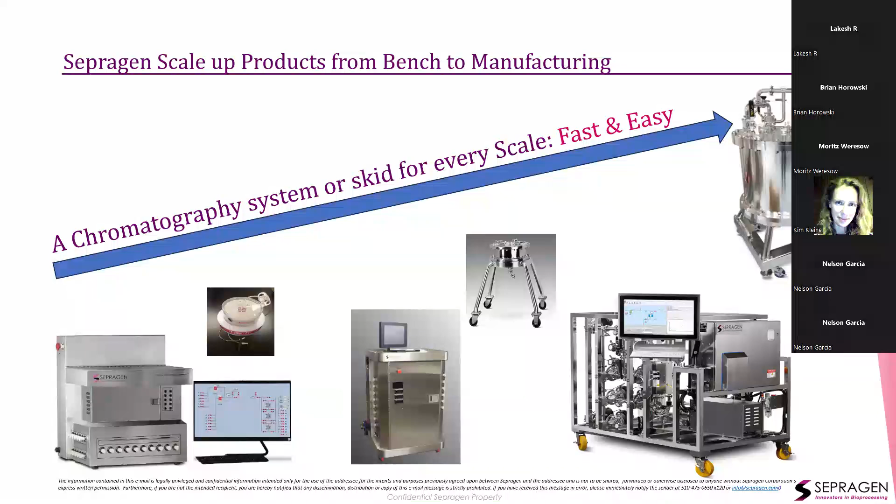Okay, so now we are going to get started with the topic at hand, which is the advances in process chromatography systems. Now, why are we addressing this topic? Because for most people, when they are looking at a chromatography system, it's either a greenfield or brownfield site, or the equipment is older, and what do they do? They just want to replace it, right? And it's really the wrong choice to address the problem like that.

So how do these engineering companies or MSAT or PD scientists choose this process chromatography automation equipment? Well, if they want to scale up, they just get a bigger piece of equipment with higher flow rates. And they put a URS together and cut and paste from a URS they had before. Worse, they take a vendor spec and convert it to a URS, and then ask their purchasing people to find out different vendors, get bids, prices, delivery, and they eliminate them based on some technology or previous experience they had, and they go ahead with it.

Now, why do I say it's the wrong choice? Because the world as it existed 10 years ago isn't what it is today. The constraints we face—cost, space, throughput, cycle times—are very different, and your choice of equipment directly affects that. So if you look at this little plan I have down here, it's a facility blueprint, right?

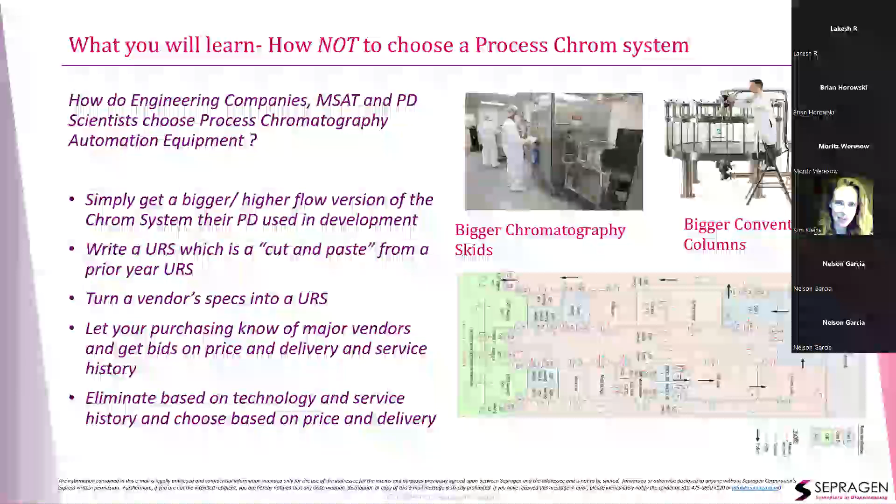DSP is stressed. We don't have enough space to fit in columns and process equipment. Maybe we can have a bigger column, sure. But then you're going to need a bigger skid. What about buffers? You're going to need more buffers. So what do you see in these facilities? You have totes lined up, buffer totes lined up down this corridor, right? You're doing more cycles, bigger equipment, longer hours, more FTEs. So it's hardly a solution to what could potentially be a big problem.

And of course, we are trying to reduce costs. We all say that, but what makes up the cost of making a biological drug? Well, of course there's amortized costs of development, sure, and regulatory. But besides that, what's really under our control is the amortized capital cost, right? The facility cost, the equipment cost, consumables, and then, of course, most importantly, labor.

Now, if you have a very complex workflow where you have 8 to 10 weeks per batch, like this on the left-hand side, different batch unit operations, and you have lots of hold points where you're getting QC done, and lots of manual intensive operations, whether it's column packing or buffer making, well, your labor costs are going to be huge, your cycle times are going to be huge. So what can you do to address that? Well, your choice of equipment definitely impacts that, and we'll see as we go forward.

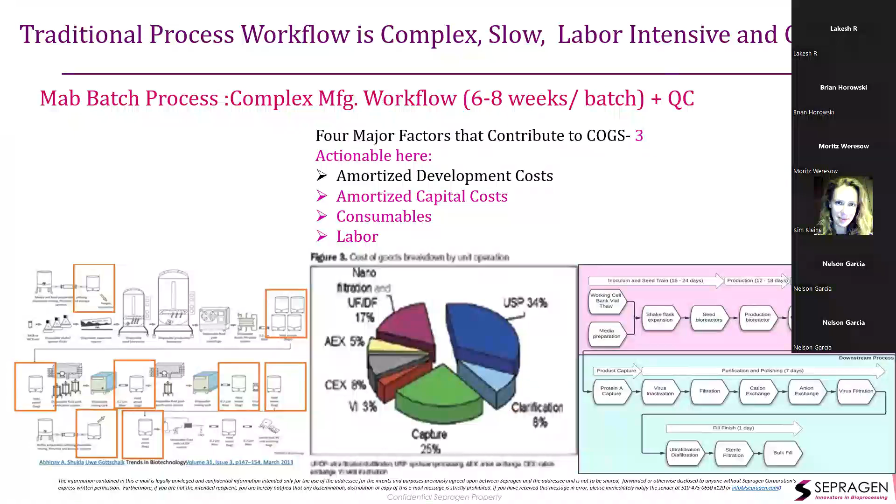And this is a typical antibody manufacturing process, going from cell culture, centrifugation, chrom capture, viral inactivation, flow through steps, UFDF, formulation, fill, finish. You have hold points along the line, and you have buffer management for all these different steps. So again, slow, laborious, traditional processes.

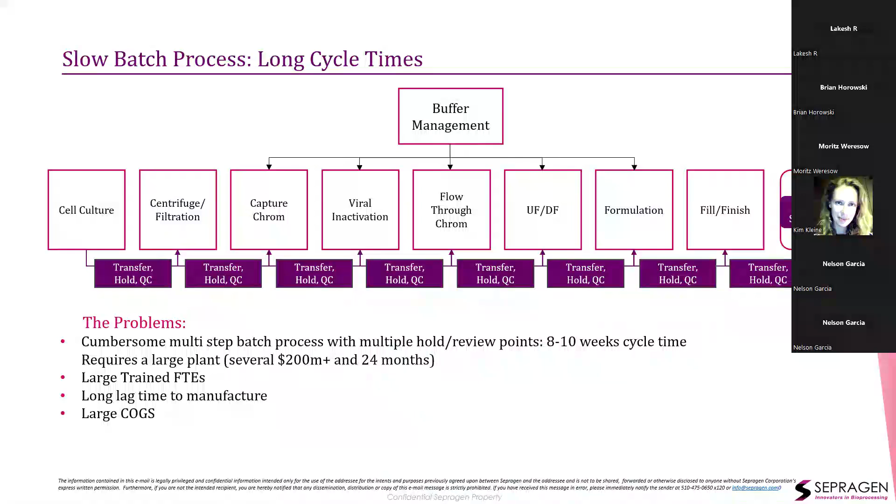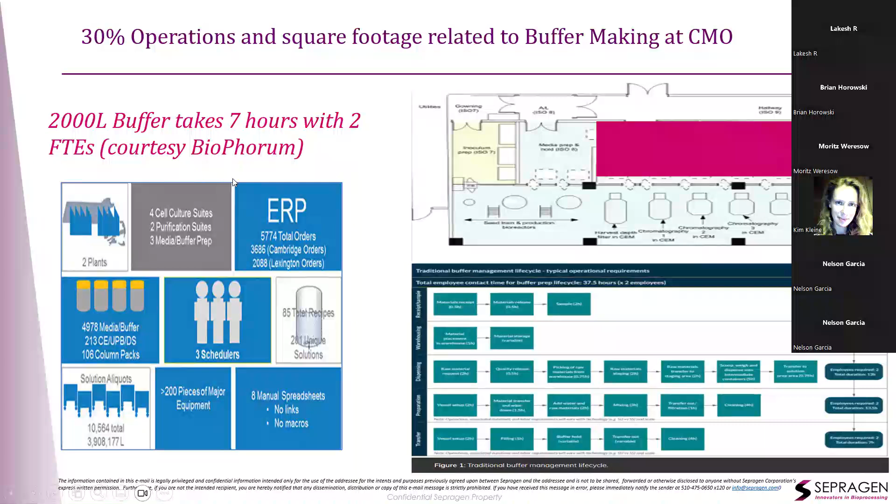Now you'll say, why this? I thought this was advances in chromatography. Why are we talking about buffers? Buffers are integral to doing chromatography on a large scale, right? And here, for instance, there are 4 cell culture suites, 2 purification suites, 3 media and buffer prep, in these 2 facilities that BioPhorum looked at. So about 30% of the operation is buffer making.

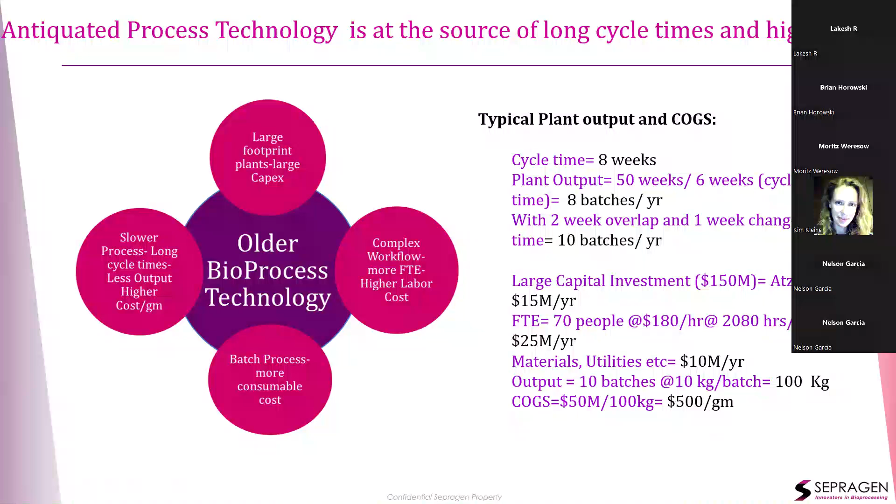And of course, all this, whether it's the capital costs or the FTEs for a particular plant, all go to make your cost of goods, right? Right down here, 8 weeks cycle time, so you can make 8 batches a year. Even with overlap, you could do 10 batches a year. If you have a $150 million facility, that's 15 million contribution per year. If you have 70 FTEs, that's 25 million contribution per year. You have materials and utilities, and the output of the plant is 100 kgs. That's $500 a gram, and that's being very generous. It's usually 1,000 plus.

So what can we do? Okay, what are the 7 critical advances that we want to address and talk about today?

One is that when you get a chromatography system, you want the maximum range from those machines, so you can use smaller columns, medium columns, larger columns, as wide a scale as possible. That's not the case with most systems. I find people saying, okay, we know we're going to be running at 3 liters a minute, let's get a 10 liter a minute machine. Well, that doesn't work that way in case we have to scale up.

The problem is that machine is then not effective on the low end of the flow rate. So the pumps don't run very accurately when you're running at a liter a minute or 500 mils a minute or something like that. The turndown ratios are not there. So then you're running your process, which you think you've designed for the future, but it's really being compromised because you're running at a very low flow rate. So the repeatability isn't there, and the variance is very high, because it's usually a function of the max output.

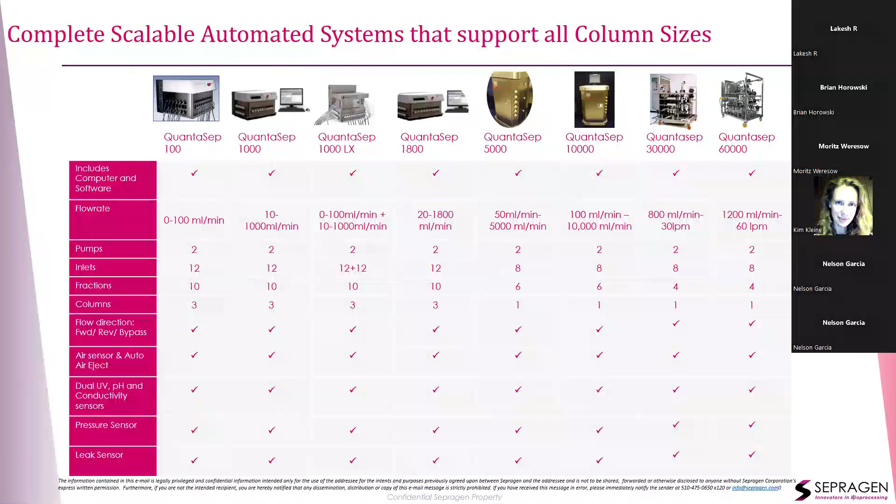And small scale, 0 to as little as 100 mils a minute. And similarly, we have single-use systems going from very tiny scales, 0 to 100 mils a minute, with disposable sterile flow paths that you could use for gene therapy, for instance, all the way to much larger scales doing 1,000 liters an hour, again with multiple flow paths.

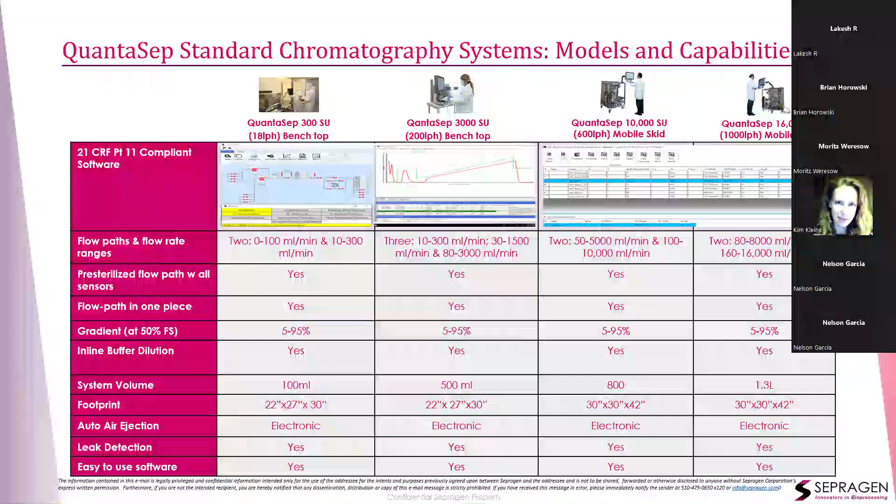So I'm not going to go into details here, I'm just giving you an overview, so if you're interested, you're at least aware of what's out there in the universe. And if you choose to, you can engage with us. We'd be happy to discuss further.

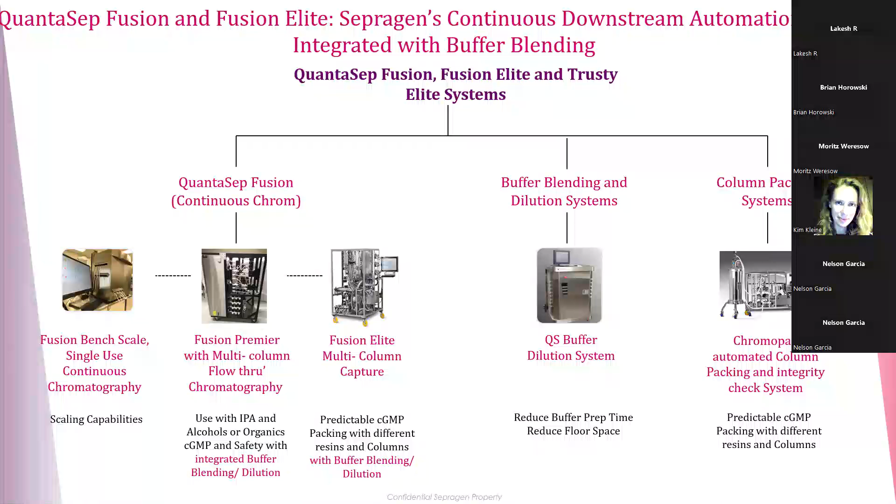And then continuous chromatography. We have bench scale systems, large scale systems, buffer dilution systems, buffer blending systems, column packing systems, explosion-proof systems for people using organic solvents.

So just to give you an example of the level of flexibility, and when I was talking about wide range, for instance, I'll take the example of multi-use systems called Trusty. I'll take the example of our QuantaSep Trusty 1000LX. You'd say, what is that? Well, it's a bench scale chromatography system which has 2 flow paths in one.

What that means is that you have a 0 to 100 mil gradient system, so 2 pumps running 0 to 100 mils a minute each. And on the machine and on the software, you can choose whether you're going to run in the 0 to 100 mil a minute mode - it's a double-decker system. And on the bottom, you have 2 pumps, each running at 1 liter a minute.

So you have 12 inlets, 6 inlets on each of the flow paths. You have 10 fractions on each of the flow paths and up to 3 column devices and sample injection loops. So essentially, with this machine, you can choose to do PD work and use small columns and run between 0 and 100 mils a minute, or you could put bigger columns in here.

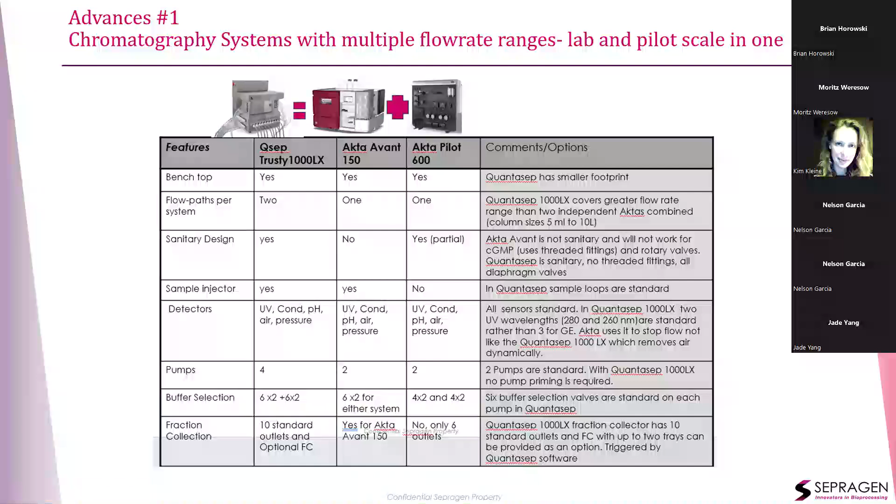If you're using both all the time, great, then this is a good solution for you. If you're not, and you use this larger machine once in a while, then it's a wastage of space, wastage of money, wastage of FTEs, because on one machine with the same HMI, you can choose whichever flow path you want to run and do development work as well as scale up work in the same machine. That's what I'm talking about, having this additional capability and having you be aware of what's really out there.

And this shows you an inside look of the two small pumps and the two larger pumps at the bottom, the small flow paths with smaller valves and the larger valves, all with the same software, so you can choose whichever flow path you want to use.

And then advanced capabilities - everyone can make a method, do equilibration, wash, elution, sample injection, fraction collection, have a fraction collector, collect a bunch of fractions, all that. You can automate, you can do things manually by clicking on the picture. Our systems would do that, but here's the deal - if you're doing larger runs, what about bubbles?

Air bubbles - you know that if you have a system running at a liter a minute, and air gets in, well, you can have an air sensor and that'll give you an alarm, it'll pause. Somebody has to do something about it.

If you put a bubble trap, then the bubble trap has cleaning issues. You have to clean it. It has dilution issues - you certainly can't run gradients through the bubble trap. So that's a problem. What we have is an auto air eject system, meaning our system is smart. It'll detect the beginning and the end of the air bubble interface, and it ejects it out in real time.

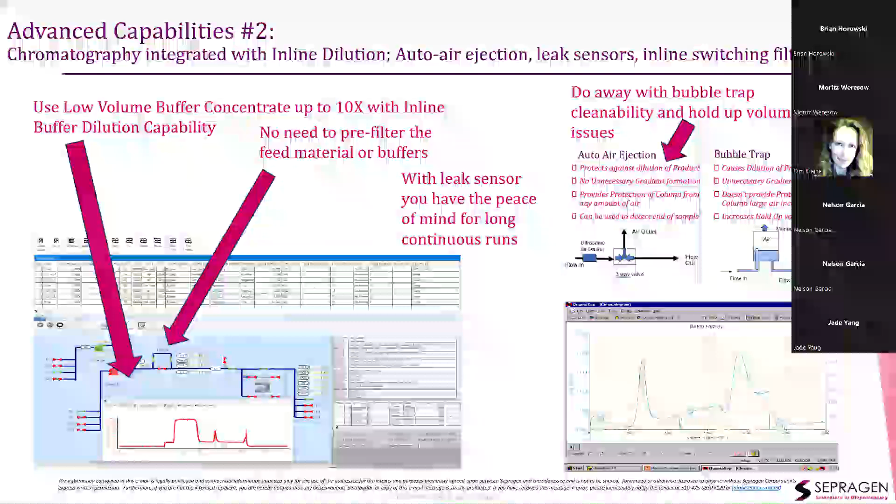And then we have a whole range of single-use systems. These are some very small systems. For instance, on the right here you have an Adept. On the left here you have an Adept 300, and that has two flow paths - one between 0 and 100 mils a minute, which is a 1.6 millimeter flow path, and also a 3.2 millimeter flow path. You can simply change this whole entire flow path out in about 15 minutes. It's one contiguous flow path.

And then you have larger systems - a 3 liter a minute system where you have 3 flow paths, running between 0 and 100 mils a minute, 80 to 300 mils a minute, 130 to 3 liters a minute, in the same machine. You can also have the ability in these machines to do inline buffer dilution. These machines have been scaled up to over 1,000 liters per hour, single use, single flow path.

We've got videos on this. I'll just show you a small clip. I don't know if you can hear this or not. Well, I think we're going to pass.

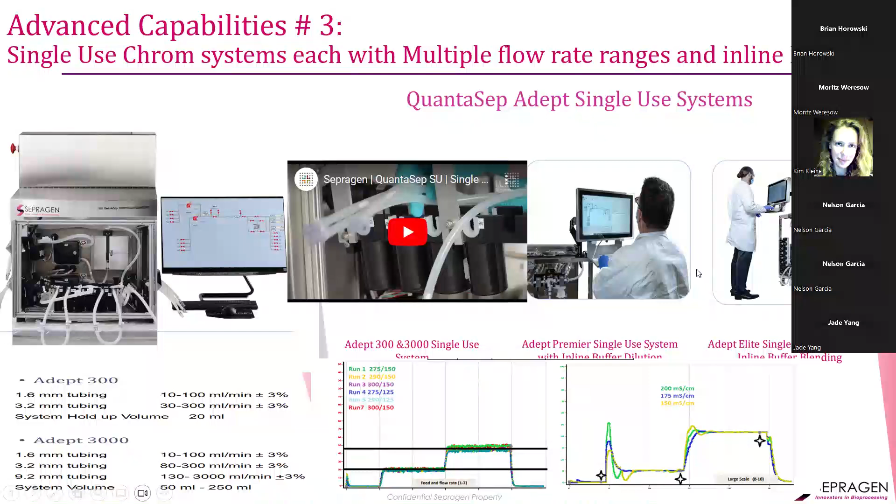And the next advanced capability of these systems is the advanced software in process chromatography systems.

Standard capabilities - other vendors have these too, like operation from this graphical screen. You can click on the valves and pumps, enter the flow rates, and run manually, and then the flow path will light up.

Or you can make recipes. Our recipes look like a little Excel spreadsheet, where each row is a chromatography step, and in the individual cells you can write down the valve you're flowing from, or the fraction you're going to, or the mode of change of the particular step, whether it's on time or volume.

Or UV or pH, bed volumes, things like that. You can see real-time chromatograms, linear and step gradients, alarms, going to manual intervention, auto air ejection, inline calibration, HETP analysis, asymmetric. So those are all very standard features that everyone has - we have them too.

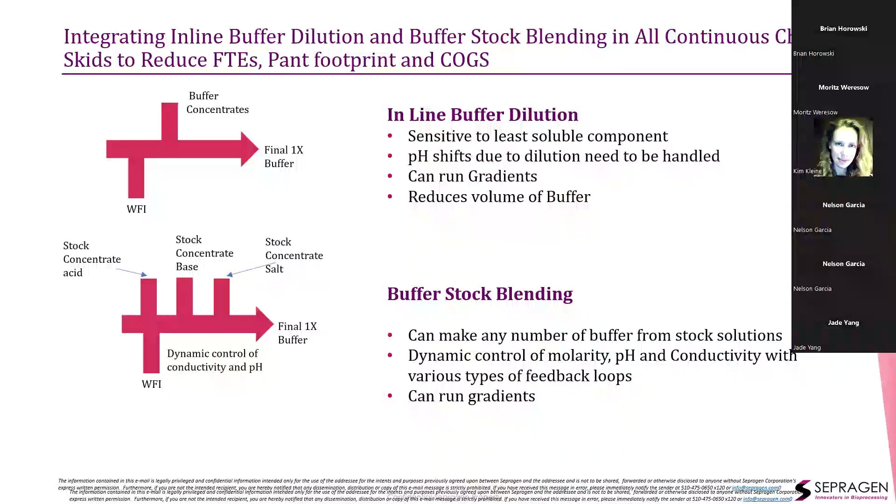Now if you want to make a 0.05 molar equilibration buffer at whatever pH, the pumps move in such a ratio so they deliver that at point of use, with the right conductivity. And then the wash buffer is made. So you don't actually make concentrated versions of any of the buffers - you don't have to make buffer making at all. Just have stock concentrates, and the buffers get made in line.

So here, for instance, is a very large system. This is one that one of our customers wanted - it's one of the largest systems of its kind in the world, 7,500 liters per hour. At that scale, making buffers manually - this was for COVID vaccine - would have been crazy, very arduous.

So this system comes with 5 pumps - buffer concentrate pumps, WFI, harvest pumps. You can load, and then make equilibration, wash, and elution buffers in line. Here, for instance, with 200 millisiemens salt, you're making 7 millisiemens equilibration buffer and 24 millisiemens wash buffer. You can see how quickly that's made, about 30 seconds.

And then same thing with the pH - whatever pH you choose can again be fulfilled. So the equilibration buffer might be at a certain pH, the wash buffer might be at the same or different pH and different conductivities, and the systems make that. We're running, in this case, up to 7,500 liters per hour. You saw the little systems running at 0 to 100 mils a minute - these are the large ones, and we have everything in between.

Again, we have a video showing details of this system. I'm not going to have you see the whole system - I'm just going to show you some clips of the video.

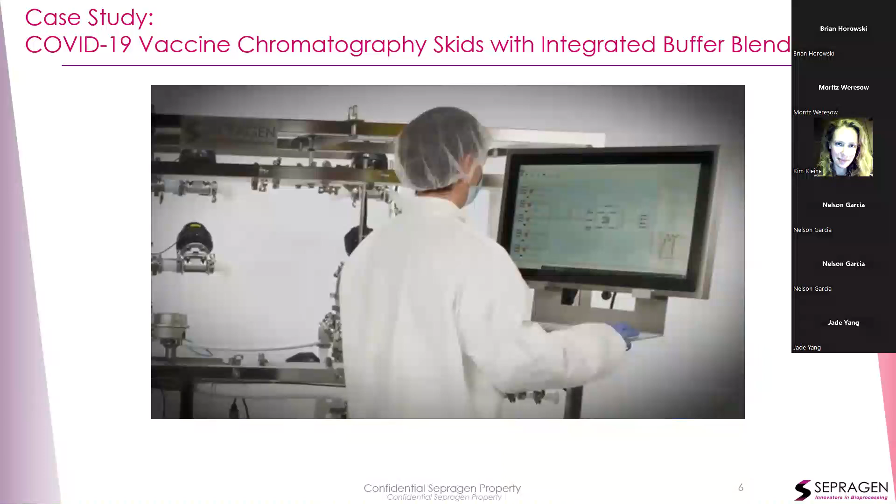So essentially, what you have in this kind of machine is the capability to do both chromatography - this is a Trusty Elite - and buffer blending, which is the same as two machines from our competitor, where one is a chromatography system and the other is a buffer blending system.

Both these functions - in a normal bioprocess manufacturing environment, somebody would use this machine down here to make the buffers in totes, then take those totes to the purification suite where you'd have a machine like that doing chromatography, and connect those buffers to that machine to do chromatography. Now here are the stock concentrates.

So in our machine, you would simply have these stock concentrates and WFI connected to this machine, and you would do both chromatography and the buffers would be made in line. So you eliminate the need for both these machines and replace it with a machine much smaller in footprint and with dual capability. So you save time, save space, simplify your process, and reduce your FTEs.

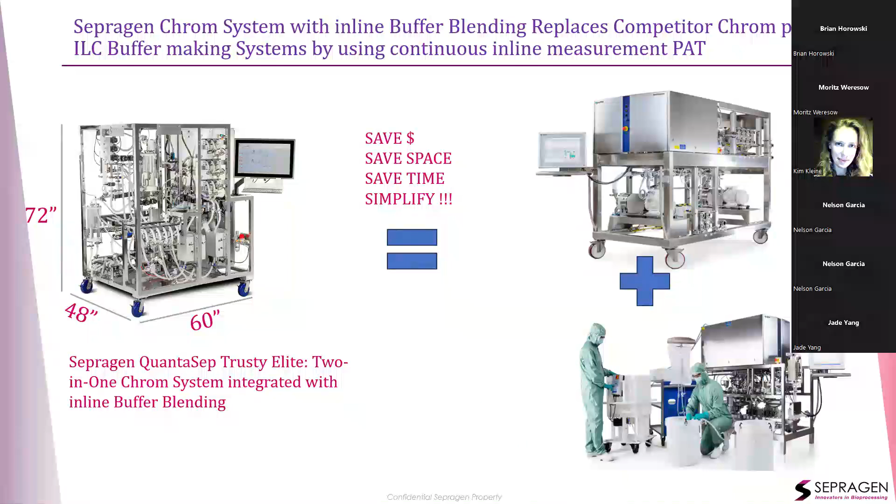These systems have been used on very large scale. Today we are doing what will be the largest insulin plant in Asia, about 2.5 tons, outside of Singapore.

The ability to use our columns, which were the feature of a previous webinar, along with these buffer management systems really reduces the footprint significantly. It reduces the buffer tanks from 6,000 liters to 2,000 liters, and they can go the entire run without needing to make several batches of buffers, which they used to have to do even at 6,000 liters.

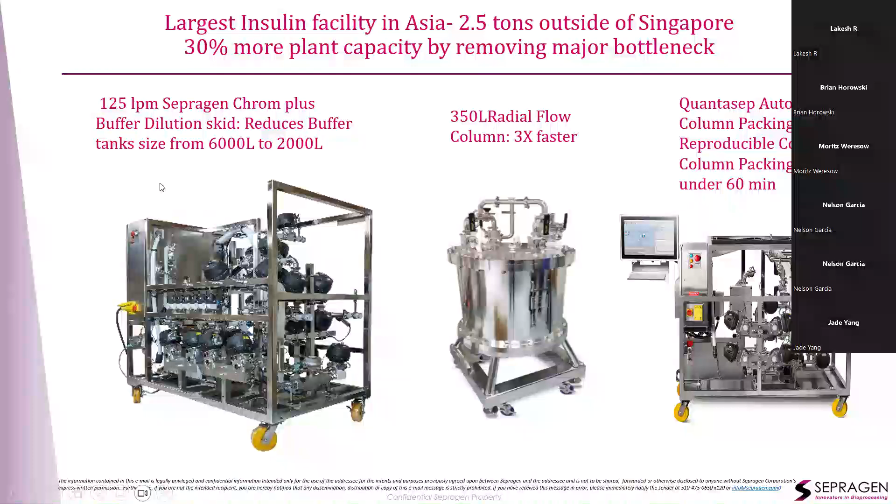They validated that the buffers could last as much as a week. We are running with automated column packing systems, and they talk with each other - they can integrate with each other. The system software can also talk to the buffer holding tanks.

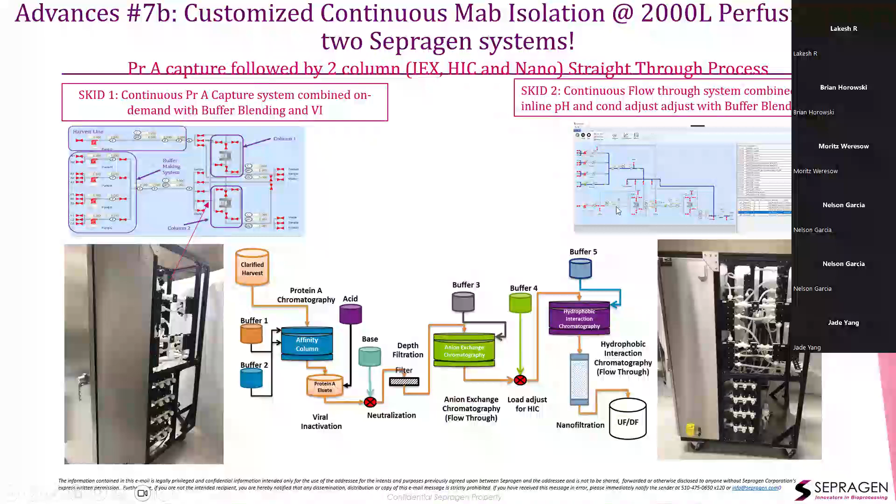Overall, as we said earlier, there are significant savings in space. We also have the ability to customize different unit operations. For instance, in a flow-through skid, we can take a flow-through anion exchange and a HIC column, as well as a nanofilter, and integrate that into one skid. But I'll come back to that in a few minutes.

The next real advance we want to address is continuous processing. Sepragen's got end-to-end - people want to do end-to-end continuous processing. Continuous processing has come upstream, where people are using perfusion bioreactors along with ATF, and they've developed something like a capture chromatography system with multiple columns.

Sometimes called SMBs, where you're loading one column, then a second one may go in - while the first column is going into overload, the second one is being loaded, and the third column, which is presumably already loaded or saturated, is going through the wash, elution, and regen cycle. Then these flip around in a merry-go-round so that you have continuous feed and product being eluted out.

We have small-scale versions of these machines - not so small actually - again, single use with multiple flow paths running 0 to 100 mL a minute. We have one system that does that. In the same machine, you can put a bigger flow path, 3.2 millimeter, and go up to 300 mL a minute, which would work with a 250 liter perfusion bioreactor.

Pretty substantial, but the footprint you can see is very, very small, yet you can get large quantities of material. If you're doing even two bioreactor volumes a day, that's 500 liters, and at 2 grams a liter, that's a kilogram of product a day - from a small continuous line with a machine like that.

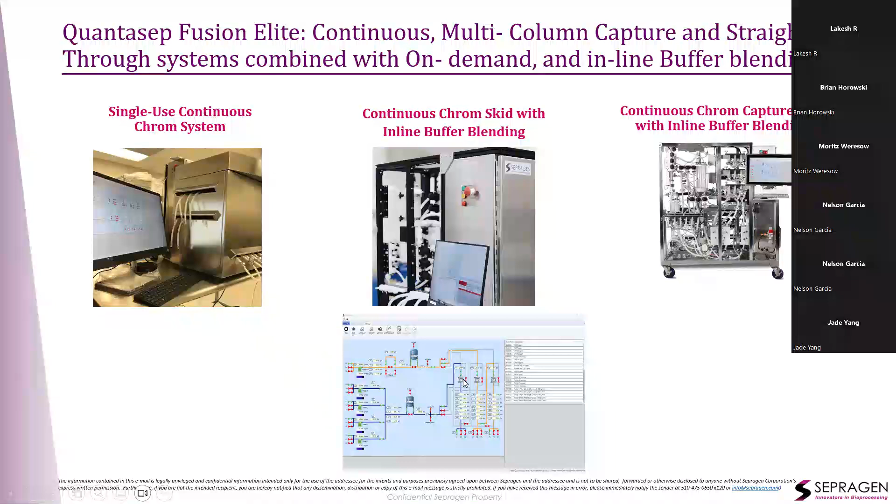Now, what is the benefit of all this? If you're running batch, the cycle times are very long. Even in fed batch, the cycle times are reduced if you overlap these different steps, and that's with medium titer. But if you're doing continuous processing, you can significantly shrink your cycle time and increase productivity by as much as an order of magnitude.

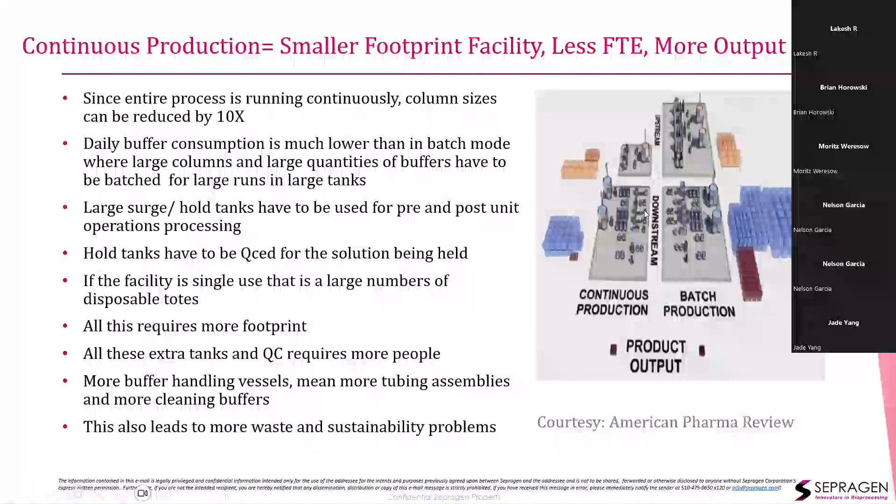We'll address this right now. Here you can see the relative facility size of a batch processing plant, and here's the facility size for a continuous process. You can see the number of totes and so on are considerably reduced. The footprint is considerably reduced on the downstream side for a continuous process - and the downstream is where the bottlenecks are, by the way. So you can have a process size reduced by as much as 10x footprint.

People have done models on this - this is not our data.

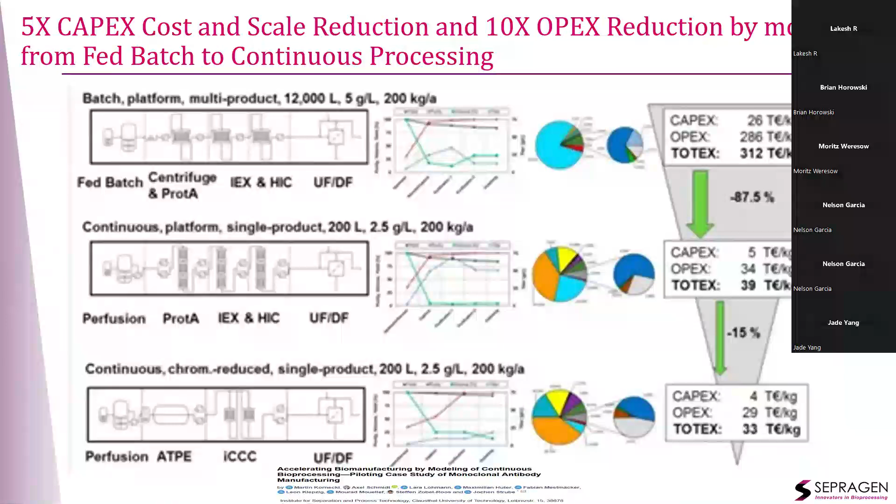Other people have done models showing that the total cost could come down from 300 euros to 39 euros, relatively. And this means a 12,000 liter facility could have the same output as a 200 liter continuous processing facility. Again, not our model, other people's. I'm just sharing that that's the trend of the industry, and we are in keeping with that whole trend.

You can see here is our Fusion Elite system, which is a continuous triple column system, and we have this with inline buffer blending.

There's no sense in people trying to move to continuous processing if you have to make the buffers in batches, because you've got to feed the beast. You're running a continuous capture, and that means the system is continuously going to require buffers. If you're making buffers down in the buffer room and moving totes over, you're running a bucket brigade trying to keep up with the system. So really the answer is to have integrated, continuous, on-demand buffer making available, and what better place than to have the Chromskid itself do it, which is what we have done here.

It's the first, we are the only ones in the world to have done that, and it gives you enormous leverage and capability in terms of the power and productivity that you can bring into the purification suite.

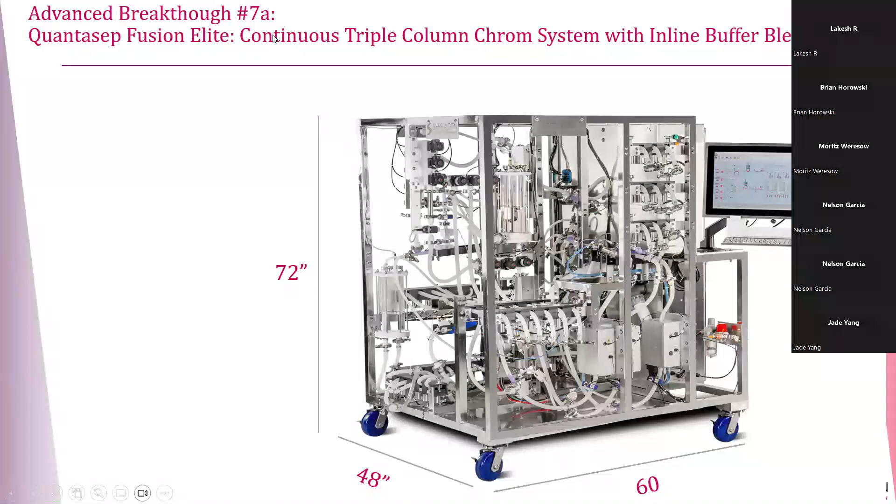That's, of course, we are keeping track of the advances. We talked about 7 advances, and that's the 7th advance breakthrough that we talked about here.

This gives you a closer look at the HMI, the human machine interface, for a machine like this, where the orange is the harvest line, which is loading onto one column, going through the second column.

And then the buffers that are made inline, the equilibration wash buffer - it's not like they're made separately with intermediate holding tanks. It's all done seamlessly. The operator simply programs in the continuous run, calls the equilibration, wash, elution steps, writes down the molarity of the different buffers and the pH and conductivity, and the buffers are made inline automatically, seamlessly. And if there's buffer that's outside the spec, that buffer is ejected until it comes within the tolerance band - you get a process tolerance alarm.

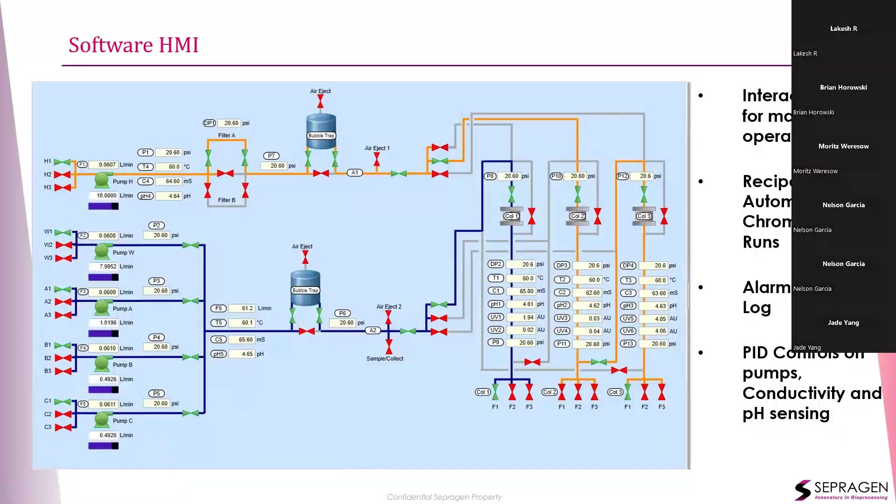And we can have these in multi-use, or in this case, you see a machine which is our Adept version, or the Fusion Elite version, where you have single-use flow paths as well.

So in this case, where you have continuous processing, the Fusion Elite - we talked about the Trusty Elite, where you had the chromatography system with buffer blending. Here, you have a continuous 3-column process with buffer blending. So again, this is the equivalent of 2 machines.

So whichever competitor in the world you go to, there are 2-3 companies that make continuous processing machines - that's what you would get. And then in order to manage the buffers continuously, you'd have to have a separate machine like that. You'd have to make the buffers and then bring them over to this other machine.

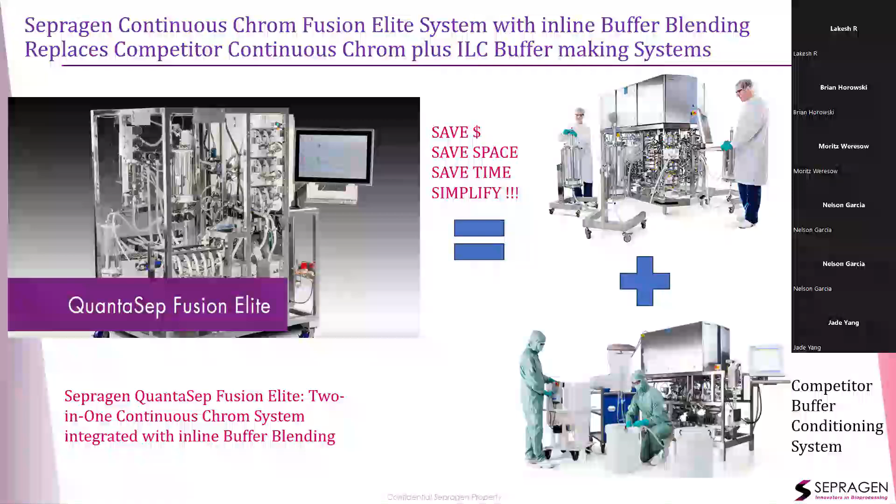And we talked about cost, we talked about footprint, and we talked about FTEs. So the space savings is about 30% of the space savings of a whole facility.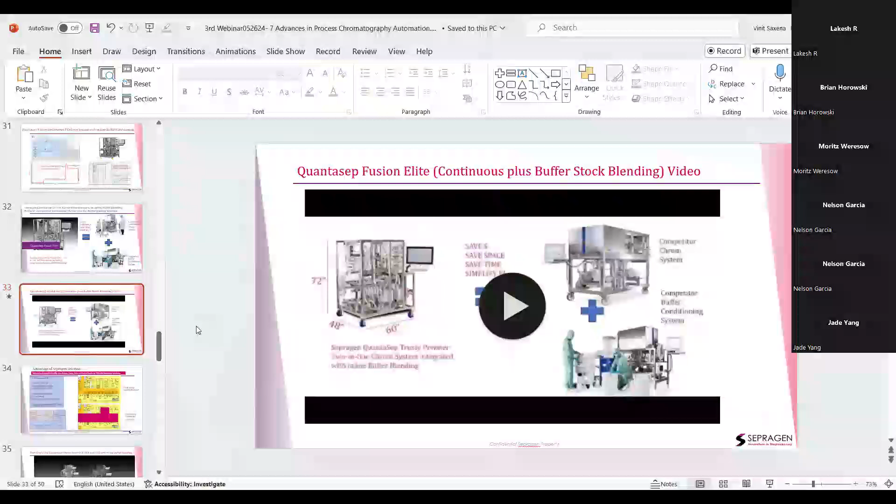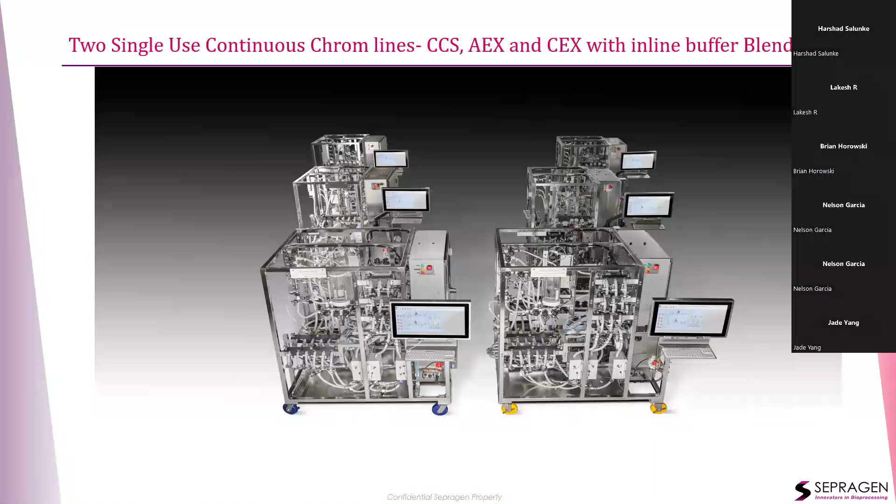The next one is for protein A. The next one is an AEX flow through and then a CEX. So these are 2 independent lines meant to run at 2,000 liter perfusion scale. And so if these technologies are used, we model that the cost of goods can come down from $400-500 to $130 a gram - significant reduction in cost of goods, significant reduction in complexity, and space savings and FTEs.

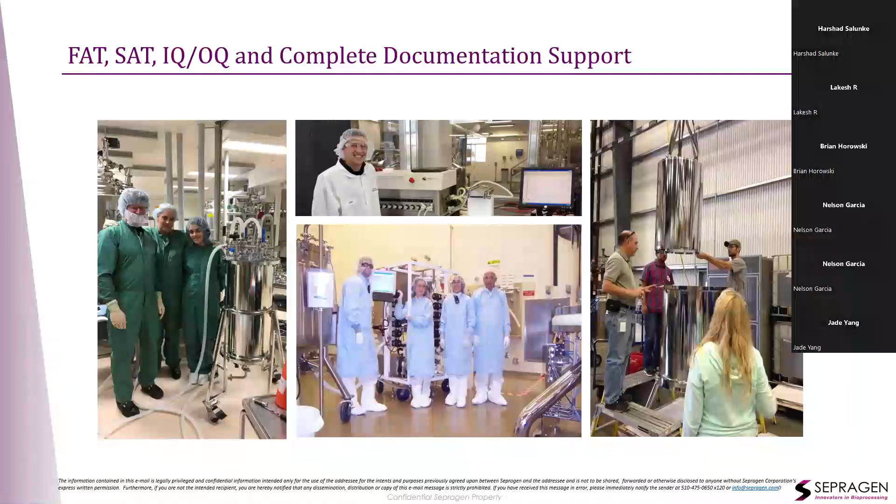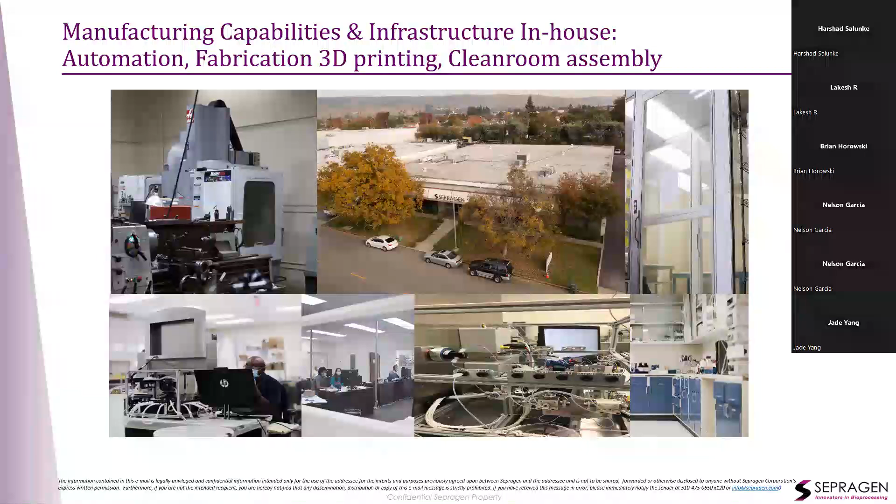We've got customers around the world. Our products are used on 4 continents around the world - a whole lot of standard machines, but a lot of customized capability as well.

Customized capability, where I told you I'd come back to it - where we've got multiple unit operations on a single chrome skid, where you may be doing HIC, AEX and HIC combined onto one skid, where the material flows through an AEX column and may have salt added to it so it can bind onto an HIC column. Or in chromatography, if you're just running chromatography, the harvest may need to be conditioned and you may want buffer added to it so that it can then go on to the column.

So we made machines like that where you can do that. Or in case you're using organic solvents, you may want explosion proof equipment. Again, we worked with people to enable that to happen.